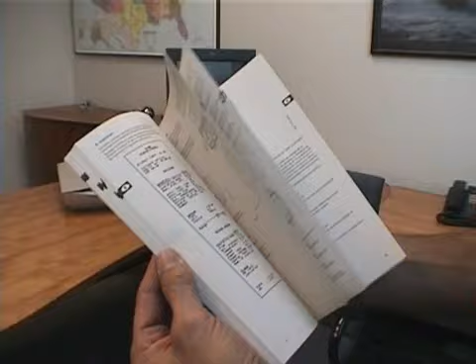The textbook for this course is the CU 301 Installation and Operating Manual, referred to as the I&O. This booklet is included in every CU 301 carton or can be downloaded from our website at www.grundfos.com. Please take the time to refer to this book as instructed during the training, and you will find it will greatly increase your knowledge and discover it to be a valuable resource for answering almost all of your questions.

The students that have taken the 30 minutes or so required to read the entire I&O have a great advantage over those that have not. We strongly encourage you to read the entire book. The objective of this module is to help you gain an in-depth understanding of the components and the operational fundamentals of each of those components in the SmartFlo system.

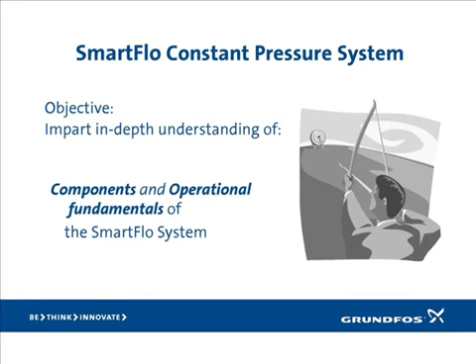First, a brief overview of the individual components used in the system, then we'll discuss each in greater detail. Let's start with the SQE. That's the actual pump and the motor. Models range from half horsepower up through 1.5 horsepower, with flow rates up to 30 gallons per minute. All models are single-phase 2-wire, powered by either 115 or 230 volts.

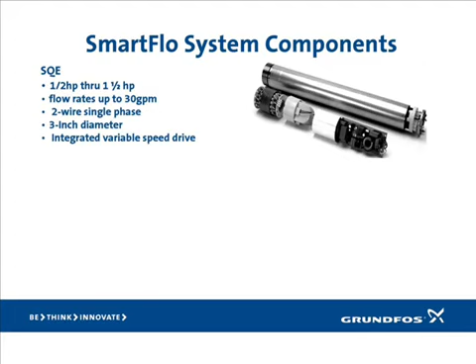The SQE's narrow 3-inch diameter eases installation in crooked or tight wells, and its extreme lightweight makes it easy to handle. The largest model weighs only 16 pounds. The SQE utilizes an integrated variable frequency drive. That is, the VFD is built into the motor.

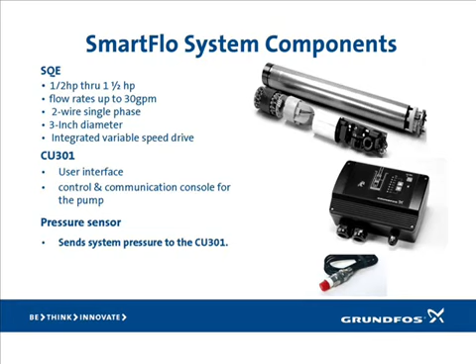Next, the control unit. The CU 301 serves as the human interface, allowing the user to operate and view the status of the pump. It also serves as a control and communication interface to the SQE, designed to read the pressure sensor and then control operation of the pump to maintain constant pressure. The pressure sensor is the feedback element, which measures the actual water pressure and sends that information back to the CU 301.

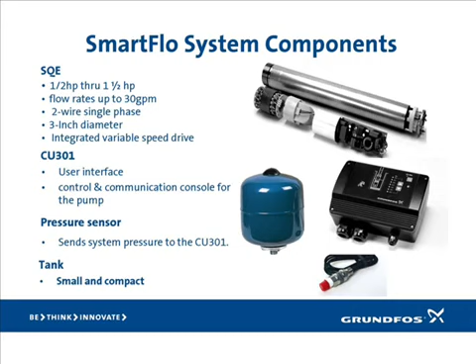And finally, the fourth component of the system, the pressure tank. Only a small 2-gallon tank is required and has the advantage of taking up a small amount of space and is less costly than the larger tanks used in conventional systems. As shown in this photo, the system can be installed in a very compact space.

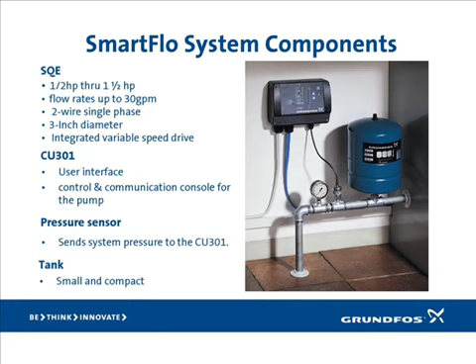Let's begin discussing the individual components now in even greater detail, starting with the SQE pump and motor. There's a lot of information contained in the model designation. In this example, the first 2 digits refer to the pump's rated flow, 10 gallons per minute. The 3 letters SQE indicate that the motor is of the SQ family, with the E indicating the unit is electronically controlled. The next 2 digits, 05, define the motor as 1/2 horsepower, and the last 3 digits indicate the maximum head the pump will produce at its rated flow. In this example, the unit will produce 10 gallons per minute at 160 feet of head.

As mentioned earlier, the SQE contains a variable frequency drive, or a VFD for short. Grundfos has taken a very innovative approach with the design of the SQE by placing the variable frequency drive in the motor itself. This had never been done before and has not been duplicated by anyone since. By controlling the frequency of the voltage applied to the motor, the speed can thus be changed, resulting in constant pressure, synchronized with the demand.

There are a number of advantages and benefits to placing the VFD in the motor. One is that it minimizes the number of conductors in the drop cable. The SQE utilizes single-phase 2-wire drop cable. A more important point is heat dissipation. By their very nature, all VFDs generate heat. If you've ever looked at traditional VFDs, you'll note that they have one thing in common: fans and large cooling fins. Since the SQE is submerged in cool water, it helps keep the heat down and allows the use of smaller, more efficient components which operate at lower temperatures, ensuring a long life.

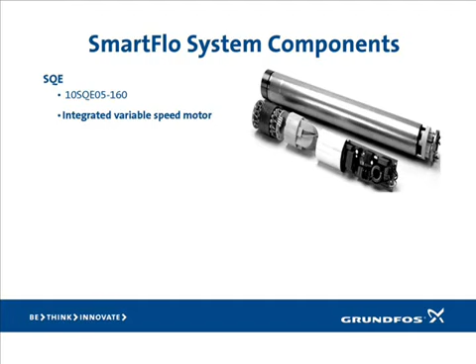Lastly, placing intelligence in the motor allows for new possibilities out of reach for conventional systems. By definition, the SQE electronics are a computer, and by incorporating sensors into the motor and assigning the computer to measure performance and conduct diagnostics, new levels of reliability and long life can be achieved. Details of these capabilities will be discussed at greater length as we progress.

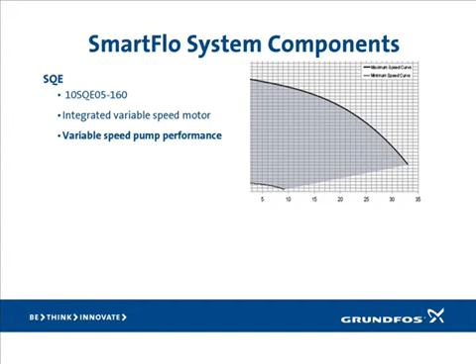The colored area between the curves represents the range of operation the pump is capable of as its speed is altered. All SQEs come standard with the built-in soft start feature. What's so great about that? Well, when a conventional pressure switch starts the motor, it instantaneously applies full voltage and current, causing an inrush current flow of approximately 5 times its nameplate rating.

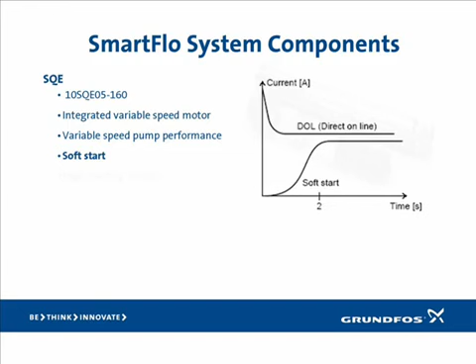Another advantage of soft starting the motor is the significant reduction of starting torque. The larger the motor, the greater the torque. It's a force that must be compensated for in conventional systems by the use of torque arresters or other means in order to minimize mechanical stresses on piping systems. While it was noted earlier that the SQE power input is single phase, the SQE motor is actually a 3-phase. The built-in VFD converts the single phase to 3-phase, and therefore the system has the higher starting torque associated with 3-phase motors.

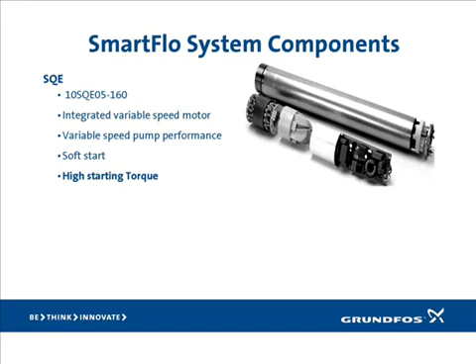Due to the built-in electronics in the SQ and the SQE, a number of advanced protection features are now incorporated into the unit as standard equipment, whereas in conventional systems, these important protection features must be added as costly, optional accessories. Let's review the list. Dry run protection. Remember, submersible pumps are water lubricated, and if you pump the well dry, you remove the lubrication, and it won't take long to damage the pump end if it's spinning dry. So it's important to protect pumps from running dry.

The SQE detects dry run when the watts consumed falls below a factory set dry run threshold for a period of 5 seconds, and the motor speed is within 1,000 RPMs of the maximum speed. If detected, the motor will shut down, and the fault is automatically reset after a 5-minute delay. Please pause here and turn to page 11 of the I&O and review this information regarding the dry running protection.

An overload is detected when the current is excessive and the motor will shut down. The SQE electronics can detect overload conditions immediately and shut the pump down, preserving the life of the motor. Reaction times are much quicker and more accurate than traditional thermal relay protection devices. The fault is automatically reset after a 5-minute delay. Factory default settings for overload are defined in the chart on page 26 of the I&O. Please pause here and take a moment to review all of the information shown on that chart.

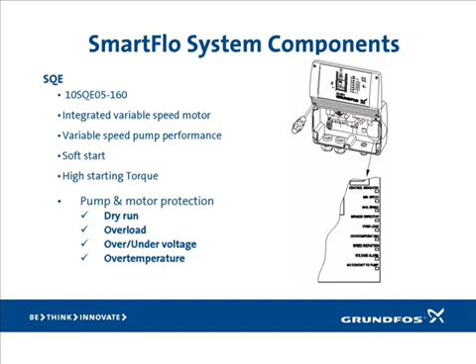Now let's consider the second main component of the system, the CU301 control unit. First, remember this box is not a VFD. It's a controller designed to measure the pressure and then command the pump to start and stop or speed up and slow down. We'll talk about how it does this in just a few minutes.

The user interface is extremely simple, consisting of only 3 buttons, the on-off button and 2 buttons for raising or lowering the desired pressure set point. Pressing the on button does not necessarily start the pump. It just enables it to start the pump if pressure conditions require it. However, pressing it to stop the pump will immediately turn it off.

The on-off button can be used to reset alarms and can also be used to force the pump to run at maximum speed. As described on page 9, by pressing the on-off button and holding it for more than 5 seconds, the pump will run at the maximum speed for as long as the button is held. This can be useful in testing the operation of the system and the ability of the unit to perform.

But be careful, forcing the pump to run at maximum speed can possibly produce an overpressurization, resulting in the opening of relief valves. Keep in mind that pressing the off button does not remove power from the SQE. The SQE is always energized whether the pump is running or not, so to service the pump, always disconnect power from the mains.

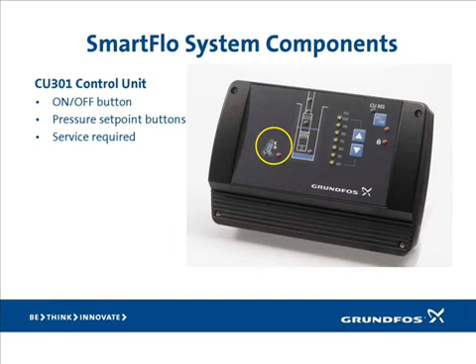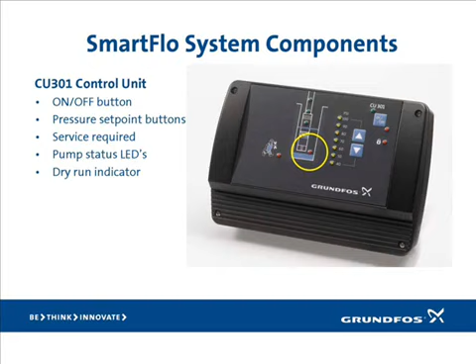The pump status LEDs indicate the status of the pump. When it's running, the green LEDs come on in a flashing pattern. If the SQE declares a dry run alarm, the LEDs shown in the circle will light. The dry run alarm automatically resets after 5 minutes and attempts to begin normal operation. However, if the well has not recovered, the alarm will recur and the cycle will repeat.

Now let's talk about the third component of the SmartFlo system, the pressure sensor. It's important to understand a little bit about the pressure sensor and how it works, as it plays a critical role in providing information to the system from which most of the commands to the motor are based upon. The specifications shown on the screen are also printed on the sensor label, as well as wiring instructions. First, it's an electronic device which requires power to operate. It receives this power from the 24-volt DC terminal located in the CU301.

It can measure water pressure between 0 and 120 psi and then sends that information back to the CU301 encoded in current flow between 4 and 20 milliamps, with 4 milliamps equal to 0 psi and 20 milliamps equal to 120 psi. Pressures between these 2 limits will generate current flow between 4 and 20 milliamps.

Finally, note that the fitting is 1/2 inch NPT and designed to be screwed into a T using the lower hex flats. Don't screw the sensor into a T using the upper hex flats, or you run the risk of twisting the sensor in half and destroying it. The upper hex flats are for holding the sensor in place while attaching conduit to the upper part of the sensor if so desired. The sensor is not waterproof, so it must not be submerged underwater or buried in soil. If water can find its way into it, it'll be destroyed. In the diagnostics module, we'll go over different ways to troubleshoot the pressure sensor.

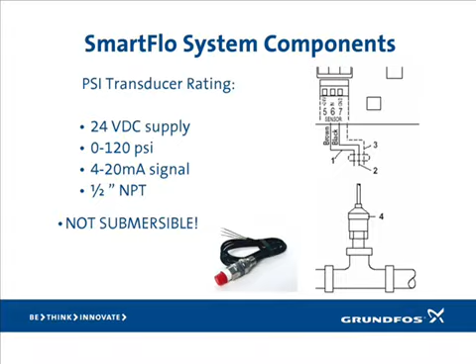The fourth and final component of the SmartFlo system is the diaphragm tank. In SmartFlo constant pressure systems, the tank serves a different purpose than in traditional pump and tank systems. In those systems, the pressure tank is utilized for both storage and to provide adequate drawdown with the goal of minimizing pump runs. Why is this important to minimize pump runs?

Recall our discussion regarding inrush currents to conventional motors on startup and the need to let the motor windings cool between starts. Since the motor is soft-started, there's no need to minimize starts. Thus, the need for a large tank is eliminated. A minimum 2-gallon size is recommended. Larger tanks can be used, but a lower tank air pressure may be required to obtain ideal constant pressure regulation.

The pressure tank acts primarily to provide enough water to meet initial flow and pressure demands until the pump ramps up to speed and takes over, typically in a matter of a couple of seconds. Before shutting off, the SQE will raise the pressure to 7 psi above the set point, thus preloading the tank with extra water in preparation for the next start cycle. Secondly, the tank serves as a buffer to minimize fluctuations during flow changes.

The proper amount of pre-charge pressure in the tank is equal to 70% of the set point pressure. For example, if the desired set point is 60 psi, charge the tank to 42 psi. A conversion chart helping you with this is found on page 8 of the I&O.

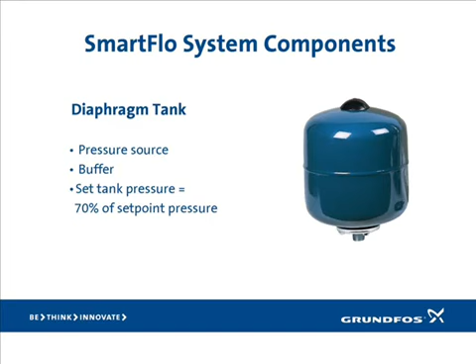Now that we've covered the 4 components of the SmartFlo system, let's talk about how the system uses them to produce constant pressure. We mentioned that the CU301 controls the pump's operation, but exactly how does it do that? The only wires between the CU301 and the SQE are the 2 power leads. Grundfos uses an innovative approach to carry messages between the CU301 and the SQE by placing them on the power leads in the form of high-frequency data communication.

It's a common technology used in security systems, baby monitors, and intercom systems which use existing AC power in a home to carry voice or data. Commands such as on, off, motor speed, and all diagnostic information move over these wires. It's a two-way street with control commands flowing from the CU301 and performance and diagnostic data flowing from the SQE.

Information such as motor speed, temperature, and power consumption, as well as any alarm conditions encountered, is sent up from the SQE. This data can then be viewed by use of the Grundfos handheld service tool, the R100. A full discussion of the powerful capabilities of the R100 will be discussed in the diagnostics module.

When messages are sent between the units, they are addressed by a preset number. For example, CU301 number 1 sends messages addressed to SQE number 1. Both units must agree on this number before they can communicate. From the factory, both are set at number 1 and nothing needs to be done to establish proper communication. However, if multiple units are installed at one site, it's necessary to change this message address number in order to ensure correct communication between each pair of CU301 and its SQE.

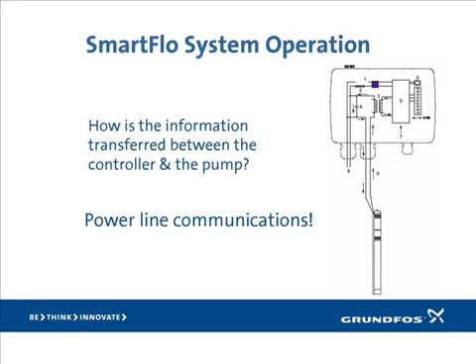If the CU301 pump power cables are run parallel in wiring trays or conduit and less than 10 to 12 inches apart, the possibility for undesired communication between units exists. When this occurs, intermittent or continuous no-contact alarms are typically seen. Other unexpected errors may also be seen. It's important to read the I&O for instructions related to installing multiple units at one site.

Every 10 seconds the pump speed is reduced slightly, and if a pressure drop is seen, it's assumed that water is being used and the pump will resume its normal speed and then repeat the test 10 seconds later. If no pressure drop is measured, it assumes that no water is being consumed and the pump will ramp the pressure to 7 psi above set point and stop. Don't confuse the frequency of this test with the rate at which the CU301 reads pressure from the sensor. This flow test is conducted once every 10 seconds, but the CU301 is actually reading the pressure many times per second.

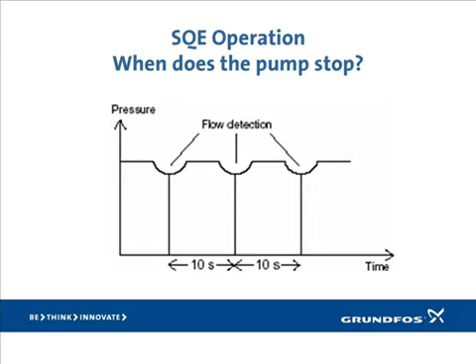Referring to the photograph on the screen, note the position of the safety relay. This is a normally closed relay through which all power to the pump flows. If for any reason the electronics fail, the relay will open, stopping the pump and preventing it from operating uncontrolled.

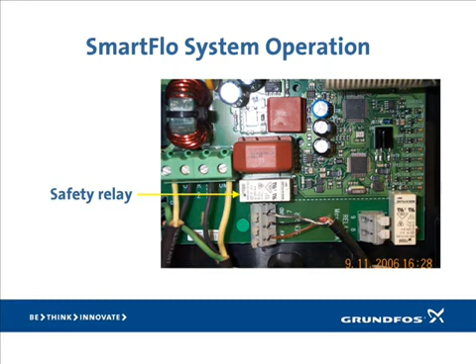Additionally, if the power line communication between the SQE and the CU301 is lost, the CU301 will begin operating the relay as a pressure switch, cutting in at 7 psi below set point and cutting out at 7 psi above set point. This fail-safe feature is designed to provide the customer with water even though system failures may have occurred until a serviceman can investigate. The CU301 has to be reset using the on-off button after each 250 start-stop cycles. The serviceman LED on the front panel will also be lit.

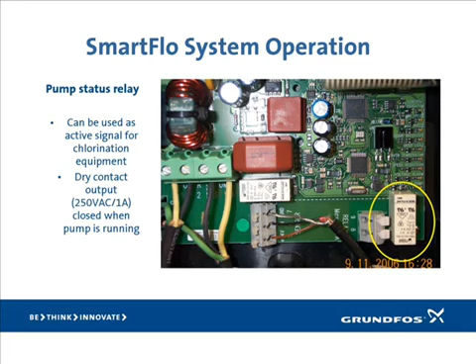A pump status relay has been added to units produced after April of 2006. This dry contact relay, accessed by terminals 8 and 9, closes when the pump runs and opens when the pump stops. It can be used to drive external devices that need to operate in sync with pump operation.

This concludes the System Components module.